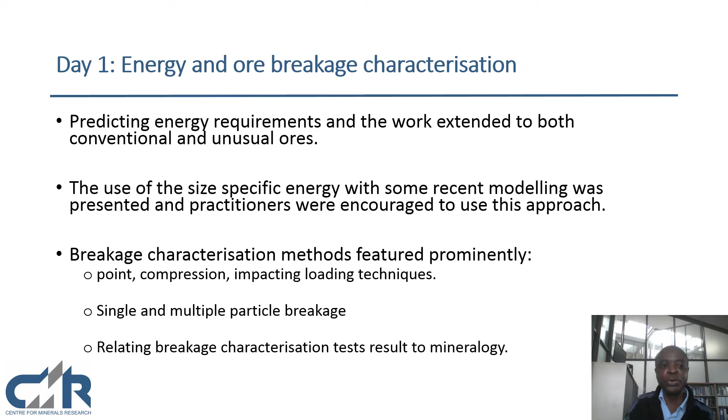On day one, under alternative comminution technologies, the Geopyora, a double wheel breakage tester, was unveiled. And this is a very interesting machine for those who saw the videos, and we are encouraged to look at how we can use this machine to see how we can quicken the testing methodology during our ore characterization tests. And a range of other breakage technologies were actually presented.

We also looked at the microwave assisted technology with emphasis on the energy savings if this system and its associated ancillary equipment was applied. We also saw acoustic measurements to characterize grinding and also to assist with stabilization for plants, particularly those that are treating variable mill feeds.

We looked at a presentation that assessed the real-time analysis of grinding media behavior in an industrial SAG mill using sensors. This was a very interesting presentation, because sensors that are based on accelerometers for both the mill shell and the grinding media were developed, and if you put these in the mill, they can give you the charge dynamics that you can use to infer the usage of grinding media and its behavior in industrial SAG mills.

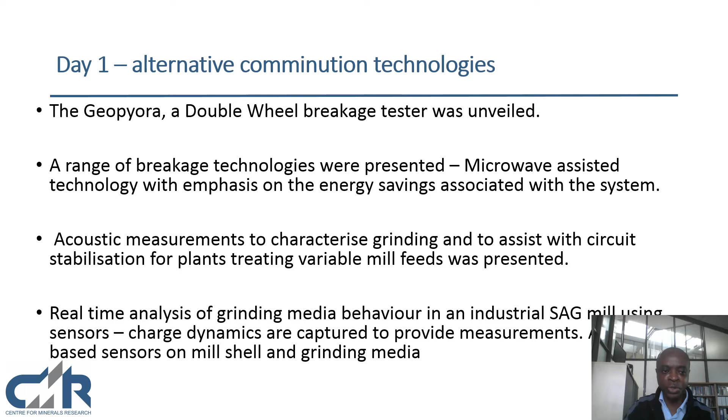We had a session which was dedicated to particle size measurements and other measurements that we could use in our systems. Under advancement in particle size measurements, we saw that the particle size control linked to measurements in a hydrocyclone or the cyclone overflow featured, and we also saw the laser sieve, which is used to measure particle size and shape.

And interestingly, there was also a presentation on deep learning techniques that have improved accuracy and can easily be integrated into control systems. So particle size measurements, a key aspect of comminution optimization, has been given a lot of attention in this conference.

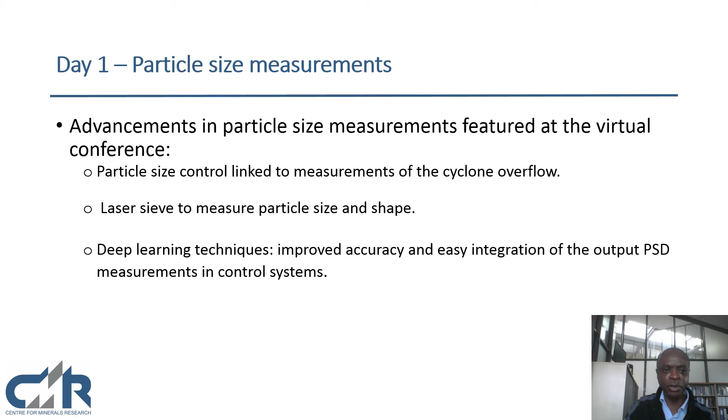We moved to day 2, which focused more on computational modeling. This was a very special day for computational modeling, and appropriately it started with a presentation by Professor Paul Cleary and closed with a presentation from Dr. Alex Potapov. In his keynote, Professor Paul Cleary looked at the virtual comminution machine, and a lot of information was presented there.

But of particular interest is that a full-scale mill simulation containing millions of particles distributed in various particle size ranges and shapes can be modeled and produce realistic predictions of both the breakage and the flow characteristics in the mill. This is really exciting because we can now start using computational tools to design grinding mills with insights on how it can operate from the breakage and flow perspective.

A number of computational models for various comminution equipment were actually presented during this conference, and the computational methods covered included discrete element methods and discrete element methods in combination with either SPH or CFD. And the equipment that was considered in terms of modeling included crushers, high pressure grinding rolls, ball mills, stirred media detritors, hammer mills, and a wide range, including tower mills and so forth.

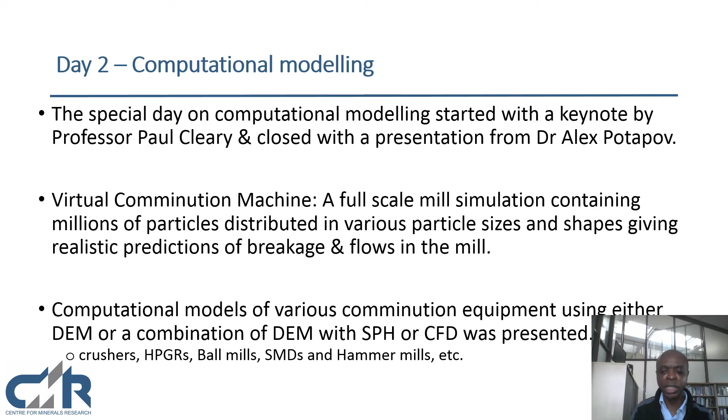I think all in all, computational modeling has matured to an extent that it can be used by practitioners to look at things like wear, breakage, and flow in comminution systems. On day 2, we had a panel discussion, and that panel discussion considered a very interesting theme. What will comminution look like in 2050? Interesting ideas, mainly on energy, water, and data-driven decision-making, came out from that panel discussion.

They also looked at how improved modeling capabilities will be influential in future comminution undertakings. They highlighted 2 areas that will make a significant contribution to future comminution endeavors. One of them was dynamic modeling, and then the other is the development of sensors. The panel was of the view that advanced sensors will provide capabilities that will allow circuits to operate more efficiently.

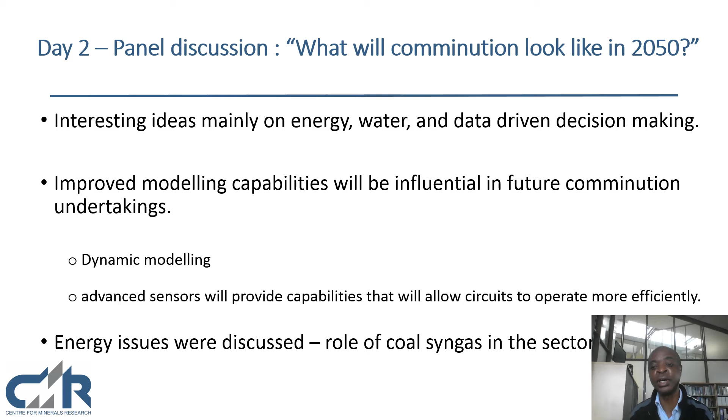They also discussed a range of issues in the energy sector, and one of the things that came out of that is the role of coal syngas in the energy sector. Still with the panel discussion, the panel was again of the view that there is great potential and challenges associated with recycling. They looked at recycling as one of the future areas that comminution will make a contribution.

However, they were quick to point out that the mix of metals in the feedstock is very difficult to separate. And they also indicated that there is actually the best potential in tailings reprocessing. So the panel was of the view that with the capabilities that we have, we can actually handle tailings processing much easier than we would in the recycling environment.

Several technologies were also discussed as part of the deliberations by the panels. One of the things that came out is the HPGR usage, particularly in dry grinding circuits with air classifiers. It was pointed out that the HPGR operated in conjunction with air classifiers is used in the cement industry to produce a very fine product, and that can happen in our hard ore environment.

The triboelectric separation was also mentioned. If you use dry grinding processes, you can use dry separation methods such as the triboelectric separation method. Other alternative methods for comminution were discussed, and those based on micro, electro, and nuclear were actually emphasized in that particular panel discussion.

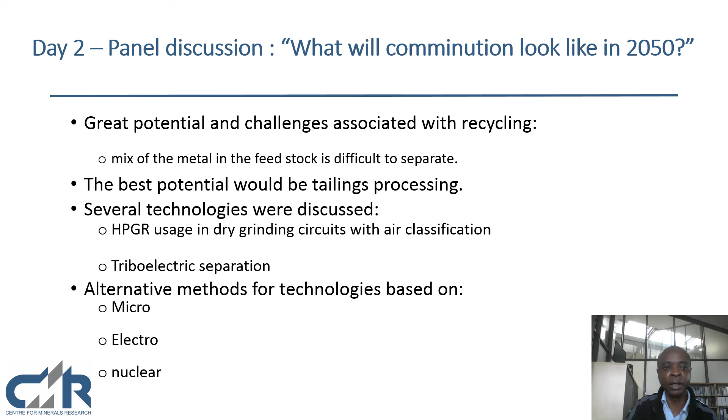Digital twinning was also considered, and although digital twinning has made a lot of improvements, the panel was of the idea that it does not match the real plant that well because of limitations with wear prediction, and also it is very difficult to obtain certain measurements that would allow digital twinning to work well. One example was to know the mineral content of a truck being delivered to the plant. So if the constituents of a truck are not known, digital twinning will not mimic what a plant is doing very well. If those measurement capabilities are improved and wear prediction is improved, digital twinning may mirror the operation of the plant very well.

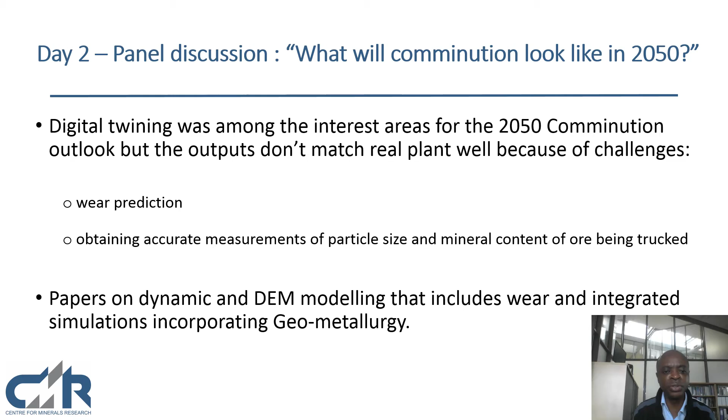A number of papers outside the panel in the afternoon were discussed on dynamic and DEM modeling, and those papers included modeling of wear and also integrated circuit simulation that incorporates things like geometallurgy. The third day, the earlier part focused on best practice and coarse comminution. The day started with a keynote address from John Starkey, who focused on best practice in comminution. It was very clear from his presentation that no improvements in comminution circuits can be realized from advancement in technology without considering best practices. So this is an important area that all of us as researchers, designers, and practitioners should take into account.

On the third day, a novel comminution device, the EHPCC, was unveiled by Mike Daniel, and he indicated that shear is a dominant breakage mechanism in this device, it does not require media, and it also promotes preferential liberation. It would be a very good piece of equipment to look at, particularly in comminution where advancements in technology are very slow.

A presentation on using SAG HPGR hybrid circuits was given, and the purpose for this was either to debottleneck the SAG mill or the entire circuit. In that presentation, Dr. Chandramohan highlighted that taking a holistic approach is actually more beneficial when looking at milling circuits. A new generation of HPGR for processing hard rock more efficiently was unveiled, and it was interesting to see that this technology is continuously being improved because it has already demonstrated that we can have significant energy savings by applying HPGRs.

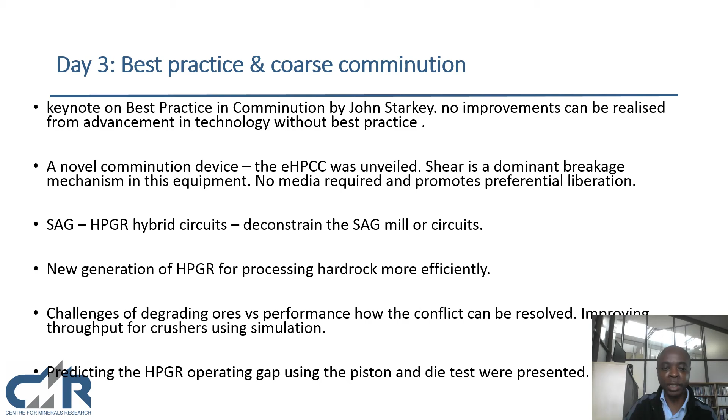Then predicting the HPGR operating gap using the piston and die: that presentation showed that you can actually use laboratory methods to infer what would happen to operational HPGRs, and the piston and die with the model that accompanies it would be helpful in predicting the operating gap in industrial units. The papers on DEM simulations looking at SAG mill liner wear and also the use of DEM to develop the Anvil hammer mill showed that DEM has actually matured. So DEM can help us to find solutions to some of the challenges that we have faced in comminution for many years.

There was a paper presented by Steve Morrell using the SAG mill circuit-specific energy parameter for SAG mill selection. This was a very interesting paper. Steve Morrell indicated that this parameter that was developed by JKTech and SMC to compare the A by B in a more meaningful and more linear fashion to see how a SAG mill would respond can actually be used in SAG mill selection.

A very good paper to look at, particularly for those that design milling circuits. There was a range of papers that looked at performance improvements in SAG mills. One of them looked at the influence of changing mill speed. The other looked at changing from radial to spiral discharge liners, and another looked at optimizing discharge liners for wear. And there was still another paper in this area that looked at optimizing the discharge flow efficiency, and it was indicated that this plays a key role in improving the overall SAG mill performance.

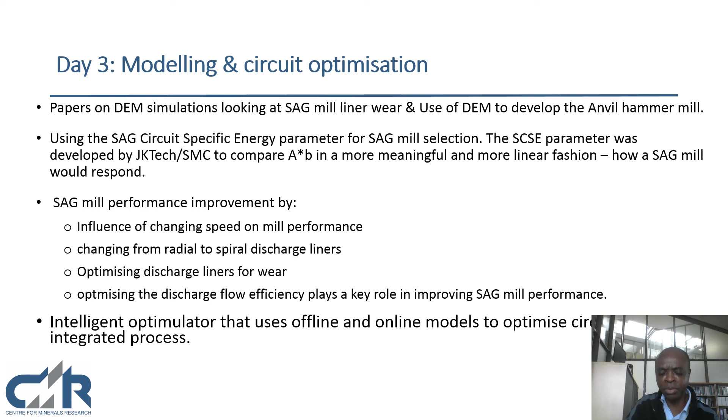We had a paper that looked at the intelligent optimulator that uses both offline and online models to optimize circuits in an integrated fashion. This paper is also worth looking at. I think it was presented as one of the things that Molycop does use in their modeling arena. The paper on the effect of pebble crushing on the performance of SAG mills highlighted the importance of pebble crushing in a circuit. The presenter indicated that this can improve circuit performance if carefully tuned in a circuit.

The presentation on sizing the SAG mills emphasized the importance of dimensions as well as power draw, and the presenter indicated that these two have a significant impact on the economic outlook of the project. And he encouraged looking at ore hardness testing, particularly looking at the SAG power index or the SAG design testing.

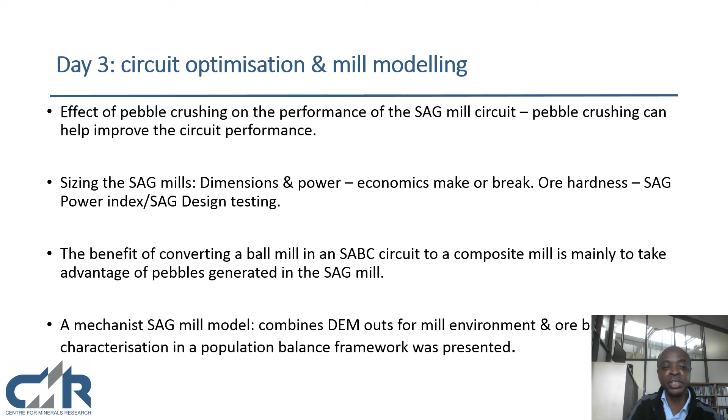The paper that was presented by Brian Loveday looked at the benefits of converting a ball mill in an SABC circuit to a composite mill, mainly taking advantage of the pebbles generated in the SAG mill to act as grinding media downstream. And Rodrigo Carvalho presented the mechanistic SAG mill model. This model combines outputs from DEM to model the mill environment and ore characterization outputs in a population balance framework. And the work he presented showed that this work has actually matured to give realistic predictions of SAG mill performance.

Day 4 looked mainly at stirred milling and other technologies, and in that session that looked at stirred milling, it showed that an energy transfer model of stirred mill technologies was developed and it can be used. It takes into account things like grinding media type, size, and also it looks at the feed as well. Advancement in design and operating of gravity mills was considered among the presentations, and the development of stirred media mill technology for coarser feed was again highlighted as a key area of focus. A range of papers looked at media selection, matching the grinding size to media size, and other important design and operating variables for stirred media mills.

Peter Radziszewski actually in his presentation showed that these stirred media mills are just viscometers on steroids, and he indicated that there are over 11,000 possibilities of impeller design. So it is very important when considering the use of these mills to look at impeller designs and the suspension that they cause in the system.

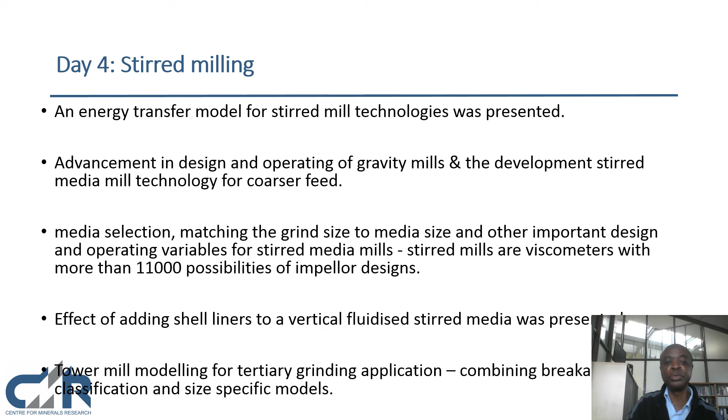The effect of adding shell liners to a vertical fluidized mill presentation was given by Elisma Ford, and in there she indicated that in some instances adding shell liners improved the energy transfer, and in other instances the improvement was not that significant. Tower mill modeling for tertiary grinding application, a mill model that combines the breakage aspect and also the classification and size specific aspects, was presented. It showed a lot of promise for modeling tower mills in this particular application.

The last session of day 4 had a lot of interesting papers because they focused on the influence of comminution on downstream processes. We had a paper that linked comminution to particle properties and flotation of scheelite. We also had a paper that presented the Kalala Mill invention, which is a device designed to carry out milling in a flotation cell. It showed that comminution is now focusing more at downstream processes because comminution is essentially there to prepare particles for the recovery processes downstream.

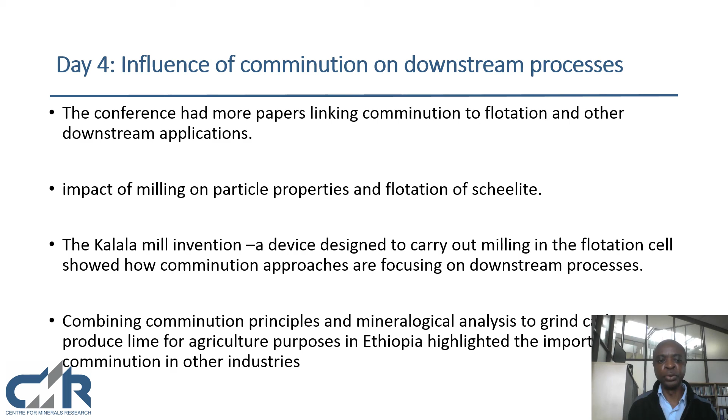And combining comminution principles and mineralogical analysis to produce lime for agriculture purposes in Ethiopia highlighted the importance of putting together a suite of capabilities both in comminution and in process mineralogy to fulfill the requirements in the agriculture sector. So this was a very interesting paper.

On the last day of the conference, a paper was presented looking at development of a methodology for reducing the capacity of an SABC circuit so that the plant can operate profitably when there are constraints on the mining side, or they are processing high grade and they have constraints downstream either in the leaching or in the flotation. So how do you reduce the capacity for your circuit so that you can operate profitably?

The last paper of the conference compared the performance of a ball mill operated with a grate discharge and a ball mill operated with an overflow discharge. The work indicated that a mill operated with a grate discharge has superior performance if the tests are carried out at the same throughput and the same ball load.

Indeed, this online comminution conference had a wealth of information. I would encourage all of you to take advantage of the presentations that are still online on the portal to go and review them and look at the findings that people came up with in this particular conference. A very good conference indeed.